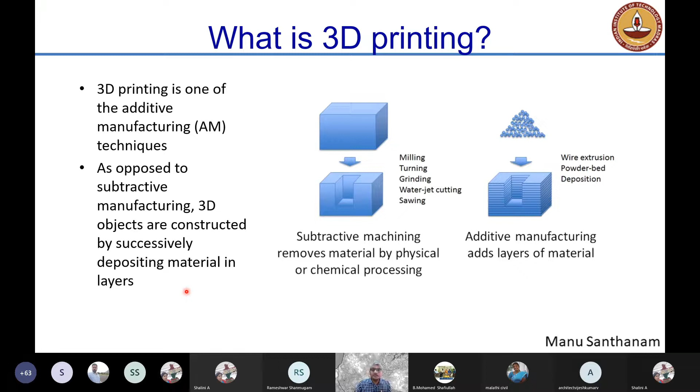In construction, 3D printing is typically accomplished using two types of processes. One is extrusion-based 3D printing, where the concrete is extruded through a nozzle, which puts pressure on the concrete and extrudes it in the desired shape. This concrete is deposited layer upon layer to create the entire structure.

That can be accomplished by two types of robotic systems. One is a frame-based system, shown here, where there's a frame with a gantry moving on it, and the Z-axis of the gantry carries the nozzle, which does the deposition while the printer moves in all three axes. You could also have a robotic arm-based system, with a single robot in the center of the room that can print everything around it—that's called a robotic arm-based system.

You can also adopt a different technique called binder jetting. This is a bit more complicated for larger structures, but important for producing intricate, smaller structures like scale models. Here, we put a layer of sand, on which we can then put a polymer in the desired shape of the object.

Or, using concrete, we can put cement mortar in a bed and spray water on it in the desired shape, with successive layers of cement mortar laid on top and water placed at those locations to give the desired shape. But there's a lot of cement mortar around the desired object that goes to waste, which has to be removed or reused for the next process. So it's a bit complicated to use binder jetting for conventional construction.

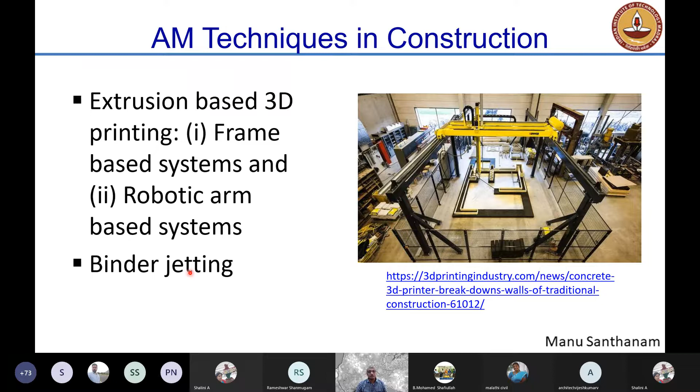From the construction viewpoint, additive manufacturing is very useful because we can reduce construction time and cost considerably. How? Primarily because we don't need formwork anymore. Many of you in construction management can calculate that the use of formwork is responsible for nearly 40% of construction cost and 60% of construction time. That's a substantial amount of time just for putting together formwork and removing it, and this time can be saved almost entirely by the use of 3D printing.

Second, and most important, you can actually achieve shapes that are not possible with conventional formwork. For instance, when trying to make shapes like circles, curved walls, and intricately designed walls, these are not possible with simple formwork systems—you need to really complicate your formwork to print forms that take the shape you desire. In 3D printing, that is possible; you can start creating shapes that were not conceivable with conventional formwork-based systems.

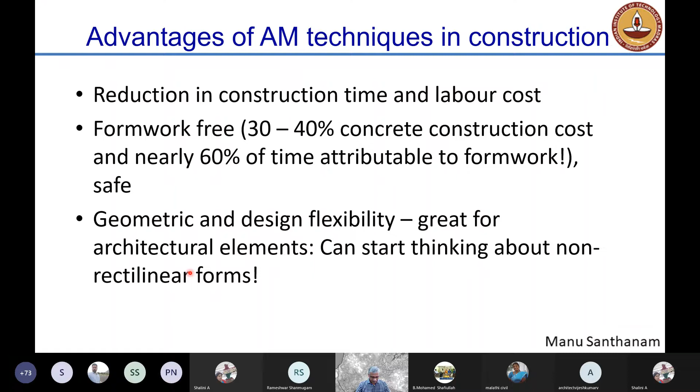3D printing around the world has become really popular, starting from about 2005 onwards. There have been several efforts in 3D printing globally. People are even talking about using 3D printing to print bases on the moon and Mars. You can imagine the extent of research being done on 3D printing over a long period of time. These are some common manufacturers of 3D printers across the world who have been doing extensive work.

I was talking about the robotic arm system. This is what it looks like. It's a robot, and the robot can actually move around itself in several different locations.

All the others shown are frame-based printers. This is the printer that Tvasta manufactured, which we are using for our 3D printing operations at IIT Madras. Again, it's a frame-based printer, and you can see the gantry here with the movable Z-axis.

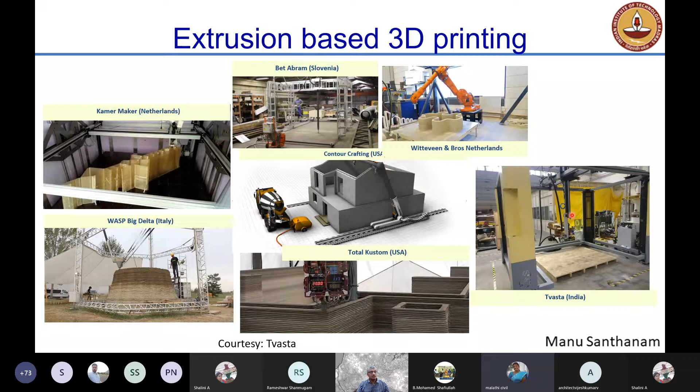Now this is a conventional 3D printing operation in a typical 3D printing factory. This is an example from China, and again here on the top left you have a frame-based printer operating and depositing material layer by layer to produce these 3D printed elements.

You have ribs in between the wall that lend it stiffness. We need some stiffness against overturning, and that is provided by putting the ribs here. Now, one thing you may notice is that you don't fill up the entire area with concrete. Only some area is filled with concrete, the rest remains as cavities.

Once such elements are printed, you can see that they are stacked on the side, and then they can be stacked in the curing yard of the factory and cured properly until they gain the required strength. Then they can be transported to the site and assembled by jointing between the different modules that you've printed separately. The jointing could be in the vertical fashion or in the horizontal fashion, and this way you can actually complete your structure.

The essential difference from precast: of course, this is the same technology as precast in terms of preparing at the factory and then sending to the site. But the primary difference here is that unlike in precast where you need formwork, here you don't need formwork. You're directly printing the desired shape, so it saves you a lot of time and perhaps cost in producing a large number of precast objects that can be carried to the site and used for the printing of the structure.

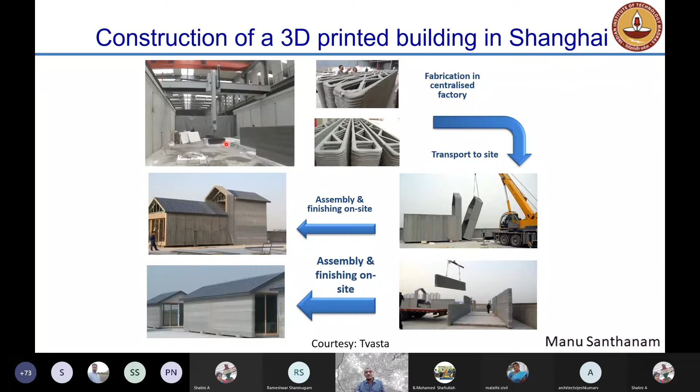Off-site implies similar to the condition I showed you here: the printing is actually done in a factory, and then the printed elements are brought to the site and assembled. For instance, Winsun Global, a Chinese company, claimed that they printed components for 10 such houses, like you see the white ones here, in a single day. Now, I don't know if the claims are true or not, but you can realize this kind of productivity with 3D printing, and that's quite amazing.

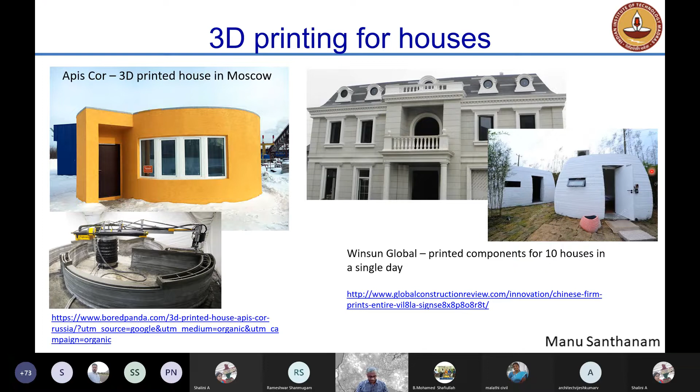There are more examples. This is an example by Icon. You may have seen a recent news item in Google News also, where Icon has used this kind of technology or house design to create a cluster of houses in Mexico. You may be able to see that news somewhere. I'll show you a picture also in the next slide.

This is again a slightly frivolous use, but just to demonstrate the use of 3D printing: you see here the concrete castle, a miniature castle. It's not really a big one, and all the elements in this castle were 3D printed. There's no steel involved, it's just concrete.

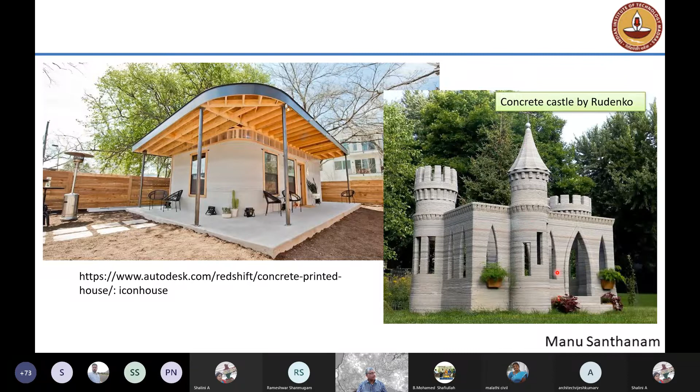Now you may ask, what's the big deal? I can as well do this with a precast operation, especially when producing very large scale objects. For instance, if I have to produce the walls for 500 houses at a single time, why don't I rather use precast? You're right, why don't you?

The only difference would be if, out of the 500 houses, 500 different owners wanted each house customized with respect to their taste, wall sizes, shapes and so on. What do we do then? We can't use precast, because precast requires all components to look exactly the same. That's something we can achieve now with 3D printing, because it can help customize mass housing, especially for ground story or single story housing. You can do a lot with 3D printing.

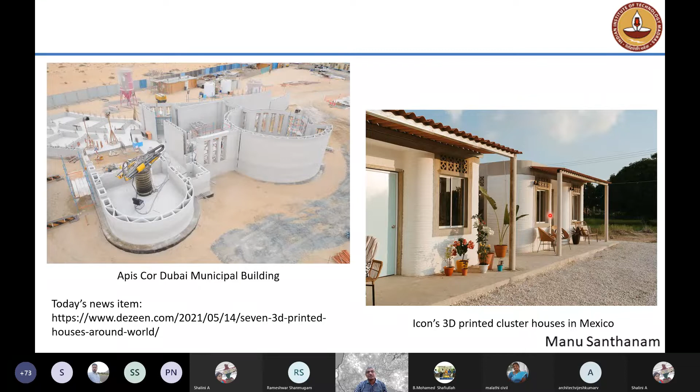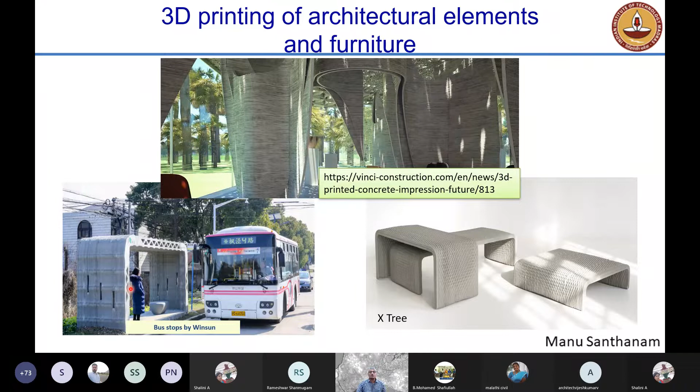Some more description of intricate shapes that you can actually print. Look at the shape of this wall, it almost looks like the interior of a tree. These are extremely interesting furniture elements that are 3D printed. This is a bus shelter that is 3D printed. So many different possibilities with 3D printing exist for creating very rapid construction, not just of buildings but also accessories.

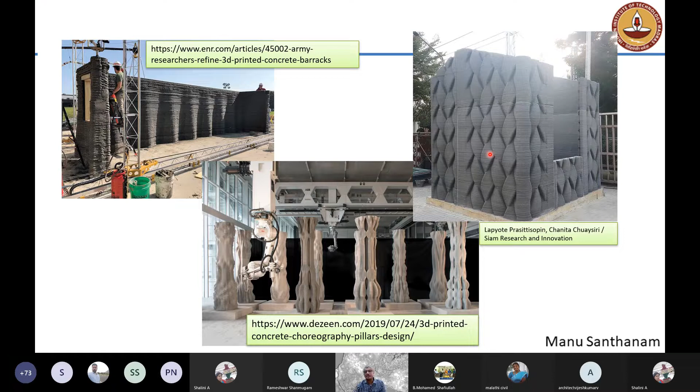These are army barracks constructed by the US Army Corps of Engineers, and these are special columns created at ETH Zurich. You can see the kind of shape that has actually been created, something not possible with conventional construction. You can see this security shed created by Siam Cement Company in Thailand, and again the kind of intricate design created by 3D printing. You can't really imagine such things are possible with conventional concrete.

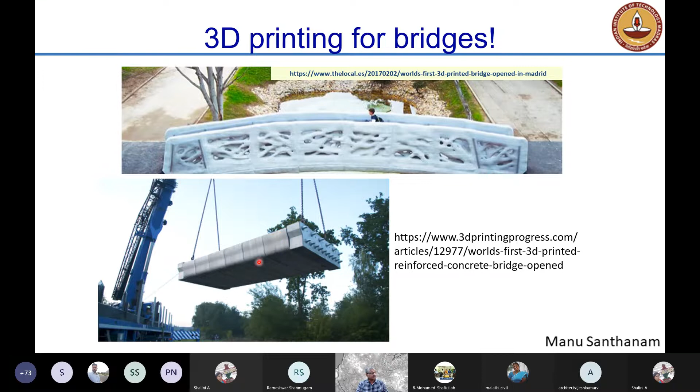Now, I've given you examples from all over the world of how 3D printing has been demonstrated. Mind you, these are all pilot projects, not really commercially intended for general use. Of course, there's a lot of commercial residential projects coming up now, but there are challenges there. I'll depict what these challenges are in just a minute.

Now, with respect to housing, there's a severe shortage in India. We expect our urban population will grow to 1 billion by 2050, a large population. Even as early as 2030, we'll need 100 million houses to satisfy the needs of the urban population. Many of you may be aware the government of India threw open this challenge for builders to come up with rapid means of construction of houses.

This was established by the Global Housing Technology Challenge in 2019, under which there are 6 different lighthouse projects taken up across the country, demonstrating the use of technology to rapidly construct housing projects. In Chennai also, there is a major housing project coming up using volumetric precast construction for demonstrating mass rapid housing.

In this GHTC event in 2019, 3D printing was identified as a potential new technology that may have the potential for revolutionizing the construction industry. With that, the government of India is trying to sponsor some projects to really get 3D printing going in the realistic construction industry. There's also a lot of private investment possible, and people have been coming, although very slowly, to start putting more investment into 3D printing to make it happen as a housing technology.

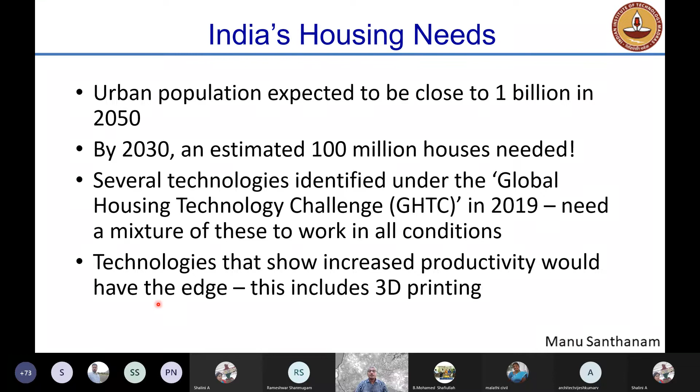Now, why do we want to 3D print houses? As I already said, precast presents a very good alternative when it comes to mass rapid construction. But at the same time, you cannot do mass customization or individual customization in a mass housing project. And that's where 3D printing can actually do a lot for you.

The other aspect is that you can produce your forms to be structurally efficient. You don't need to go with very solid looking objects anymore. For instance, when you talk about a reinforced concrete beam, that beam does not need to have material everywhere. There are only some locations where material is actually designed to resist the kind of loading that comes onto the beam. Can we make optimal shapes come out with 3D printing that can be much better in terms of lesser material usage and lesser weight overall, that can improve the performance of the concrete structure?

And again, as I said, you have most of these walls with cavities. So the cavities make it possible to actually conceal your utilities inside. At the same time, you can also do weatherproofing. Heat and soundproofing can be quite nicely done. And the other advantage could be that when you have difficulty doing construction projects in far off locations where you don't have sufficient infrastructure available, 3D printing could be an option, provided you have at least transportation infrastructure built up until a certain distance.

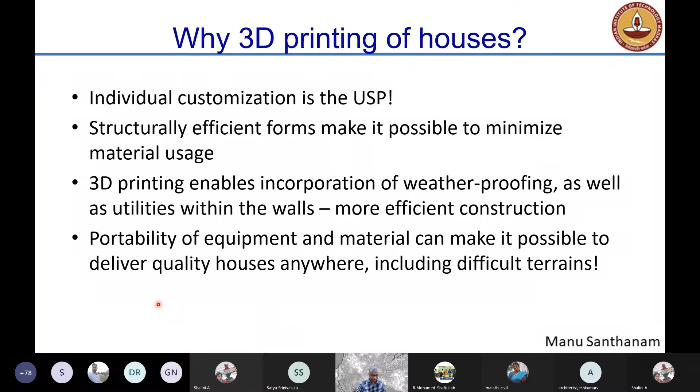Now, the issue is, are we ready for deployment for mass housing projects? Probably not at this stage, because there are several challenges. For instance, how do we automate the reinforcement placement? Right now, it's only manual. People identify where the cavities are, manually place the reinforcement, and then grout it to keep it in position.

The finishing processes can be automated also, and there's some work that needs to be done in that regard. You can, of course, do a proper 3D print and then plaster it, but plastering concrete means you're really wasting material. You need not plaster concrete. You can as well finish the surface, and that's where crafting can also be done along with 3D printing.

Now, printing is mostly interesting to do for wall elements or column elements. When you start thinking about horizontal elements, it's really a waste of time and money to start printing those. So can we think of a strategy with which these can be made without wasting too much time printing the entire element? Imagine if you have to deposit material over a large area, layer by layer — that will be time consuming. So can you adopt a way in which you print the periphery, put the reinforcement, and fill up the remaining area inside with conventional concrete, or even self-compacting concrete? That is something that can be done in a rapid fashion, right?

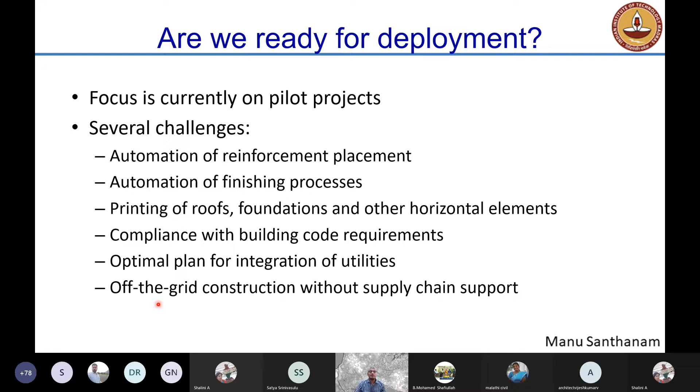The major challenge as far as housing is concerned would be, how do we make our structures comply with building code requirements? Because these are layered materials, not solid materials. So how do we measure their strengths even? How do we measure other performances like fire resistance, earthquake resistance, and so on and so forth? We need to start creating test methodologies to ensure these can be measured appropriately. And of course, when you plan utilities, how do we design the optimal plan? As far as supply chain support is concerned, if you can plan these things and optimize it, you can then get ready for deployment with this technology. There are also, of course, other challenges all over the world.

The construction industry is usually risk averse. We don't want to take too much risk as far as construction is concerned. And generally, construction is driven by cost. They are not driven by interesting alternatives; rather, the cost is driven by what is actually the cost today for doing construction, not the cost required for the complete construction project. Material cost, or sometimes the initial investment cost, often outweighs any other benefits you might think about in the long term.

As a result, implementing new technology in the construction industry is always a big challenge. And generally, consumers also fear new technology. People always think, why should I take a risk? Why should I be the first to try out a new technology? So that's obviously a challenge which you need to overcome through proper dissemination.

Scaling up requires training several people, including consultants, architects, and practitioners, on how to actually work with the material, how to do the design, how to do the construction. All that requires a lot of work in terms of scaling up, and that is still a challenge today.

And of course, there's a lack of data for regulatory approvals. How do we actually assess the material? How do we assess the structural components built with this material to really make them suitable for use in a construction project? How do we satisfy the codal requirements, the standards, and so on?

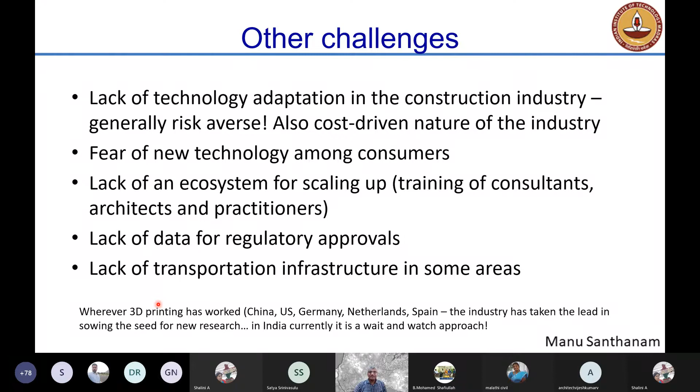Now, one thing you must note is that in all the other countries where 3D printing has been successful, such as China, US, Germany, Netherlands, Spain, etc., wherever those major projects I showed you were from, it's driven by industry. Private industry has come in a big way to drive the construction projects. In India, industry is still not fully into it. They are playing a wait-and-watch type of game. If they get in a big way, we can really push this technology to the limit.

Now I'll show you some development of the material as well as the technology in the work that we did over the last 4 years. We started off with a very simple printer. You can see a very small scale printer with a frame and the gantry, which can move in 3 axes to do the deposition. This is the first initial nozzle that we had, and these are some of the first shapes that we created. This is with lime-based materials, and this is with clay. That's the advantage of 3D printing.

Now there's a lot of emphasis around the world on going back to nature. While in India we want to move towards concrete, if you go to Western countries, people want to start thinking about how we can use local soil for doing construction. And 3D printing actually shows a way for doing that. People have built demonstration structures with local soil itself, which is being 3D printed into the structural shape.

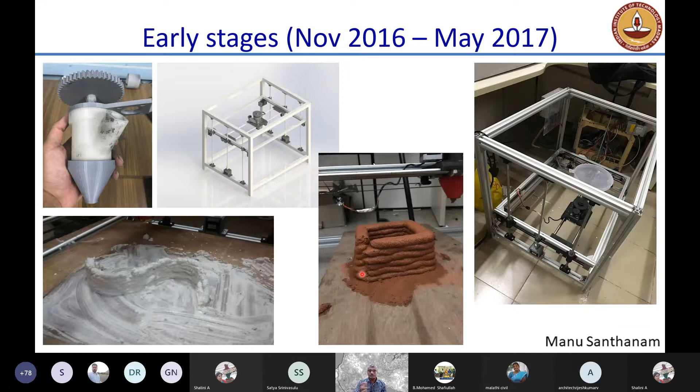And of course, we started experimenting with concrete. Now, as I told you, the concrete has to have a special characteristic because you need to push it out of the nozzle, in the desired shape. It needs to be spread onto the foundation in that desired shape. And when you put the new layer on top of it, it still needs to be fresh enough to ensure sufficient bonding between the layers. You don't wait for the layer to get hard before you put the next layer, or there'll be an interfacial problem and a major failure. So your layers have to be reasonably fresh while the new layers are coming on top.

And that requires very careful control of the rheology of the concrete. Rheology is something most of us in research talk about a lot with special concretes like self-compacting concrete, but here the rheology is a little different. In self-compacting concrete, you wanted the material to have a low viscosity and low yield stress. In 3D printing, it's just the opposite - you want a high yield stress and low viscosity. High yield stress because you want the material to retain its shape while you print on top of it.

At the same time, the material should be less viscous, enough to extrude out of the nozzle. So those are characteristics that are quite different from what we are used to as far as self-compacting concrete is concerned.

Our initial mix design used a binder to aggregate ratio of 40 to 60. You can imagine that's a very large amount of cementitious material in it. Now we are optimizing this mixture to be able to print with even 25 to 75 binder to aggregate ratio, which is more or less similar to what you have in conventional concrete.

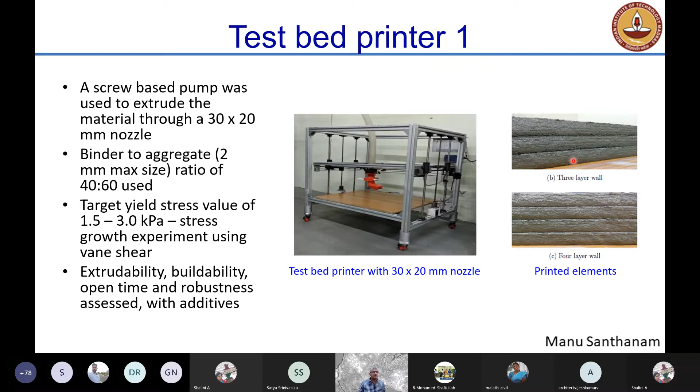These were some additional shapes. You can see square elements that were created with 3D printing, and these layers printing on top do not have such a large effect that the bottom starts deforming. If your concrete is not properly formulated, as you put more on top, the bottom layers will start flowing out—you don't want that to happen.

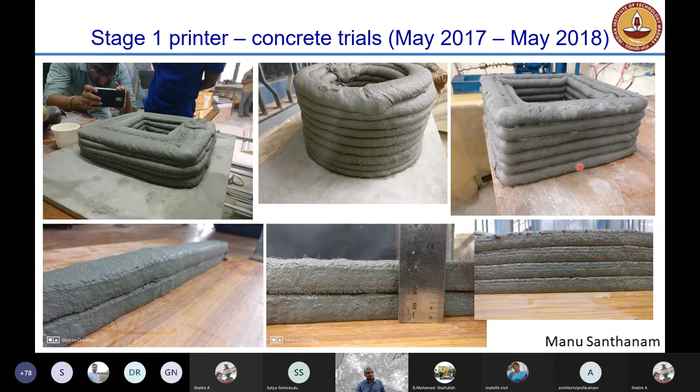Now, the issue with testing is always a challenging one, because in normal concrete you can always make cubes or cylinders and test the strength. But here, how do you bring in the effect of the interface? So you need to start thinking about methodologies more similar to masonry.

Of course, with fresh properties, you can do the flow test. You can establish the relationship between the flow and the vane shear yield stress, and use that for your design purposes.

But with respect to mechanical characteristics, here there's a 4-layered element being loaded in compression, and you can see it's a fairly good failure because the material is cracking properly and not going through the interface.

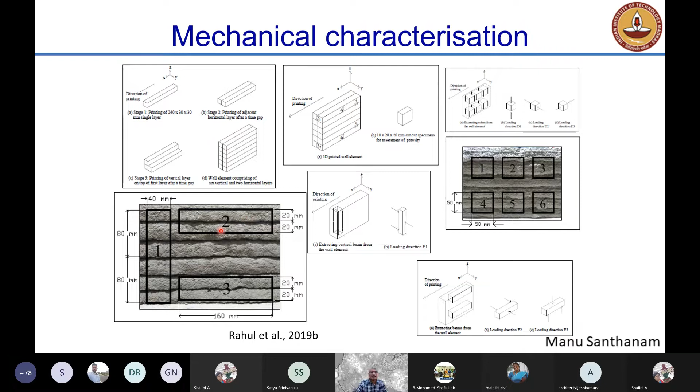Nevertheless, it's important to establish interfacial strength, so we went to a much more detailed scheme of characterization where we printed elements with multiple layers in both directions, then extracted samples from these layers. Cubical specimens as well as prismatic specimens were cut out and tested to establish the proper material characteristics and the effect of the interface between the layers.

So you see here, a flexural test is being done for a 2-layered specimen, and you have a proper flexural failure. There's some shifting of this crack at the interface, meaning it is moving along the interface to some extent.

Here it's a properly compressed material, as you see from the previous picture. This is the same sort of object which has failed in compression.

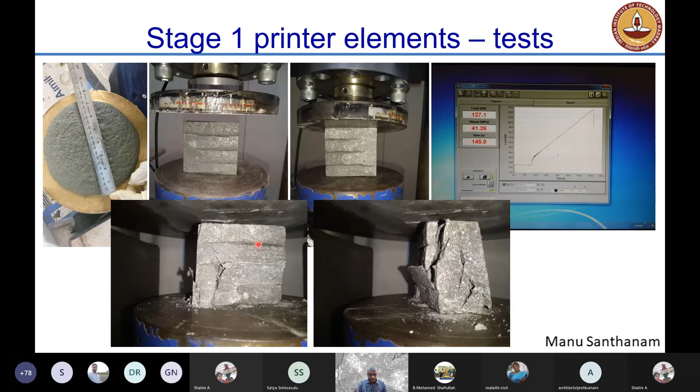This is actually a test to measure the shear capacity. What we did was we took a core in this direction, only about 20 millimeters, and used that to create this interface in the middle, then did a direct shear test on it to measure the interfacial strength.

And this is a pull-off test that is being done for the material, to ensure how well it's bonded to the next layer. So there are ways in which you can test it, but none of these are standardized yet.

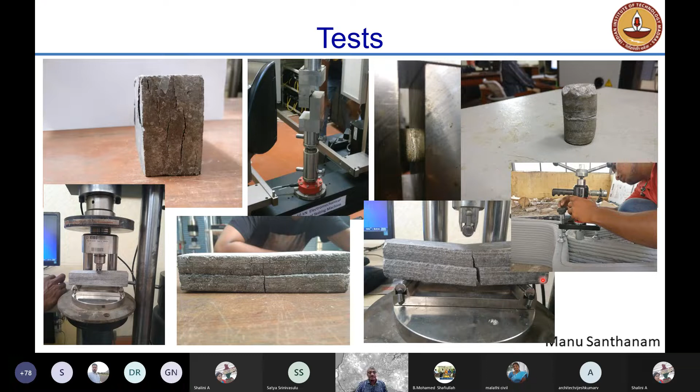These are just some shapes that we played around with, nothing special here. So from that simple frame-based printer, we moved to a larger frame-based printer, which had a slightly different way of depositing the material.

In this case, what we did was we used a pump. The material was fed using a hopper into the pump. As the primer pushed, the pump piston moved backwards to take in the material. Once all the material was filled up, the piston moved forward, pushing the material into the pipe here, which carried it to the nozzle.

In one stroke, nearly 75 kilograms of the material could be pushed through the pipe to the nozzle, so our printing was restricted to less than 75 kilos at a given time. Why? Because when the pump is going backwards, it's not pushing any material into the pipe, so you'd basically be pushing air into the pipe, which is a bad thing. You want the material to be continuously getting pushed, just like conventional concrete pumping operations.

So here is the larger printer. You can see the frame, the vertical axis, and the nozzle attached to the vertical axis, and these are the elements getting printed. These modular elements, each weighing about 60 kilograms, were printed using this kind of printer.

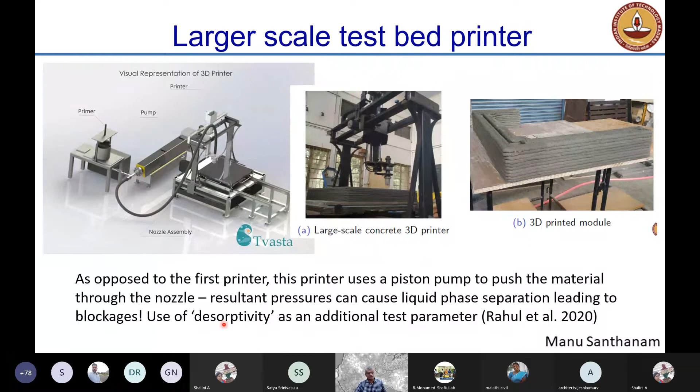You can see here the pumping being done, material coming out nicely in a single flow.

You see here the same printer now being used to actually print the concrete. Several modules are getting printed here, and we ended up printing modules which were nearly 30 centimeters in height, with 20 layers of 15 millimeter depth each.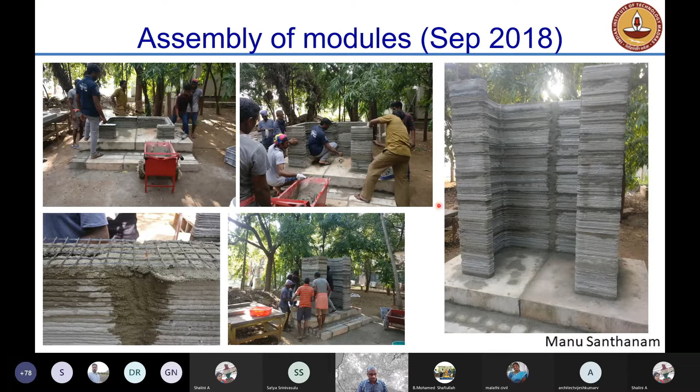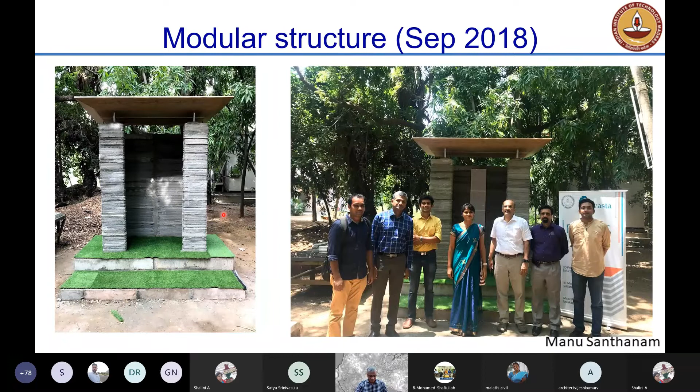Just to demonstrate the effectiveness of 3D printing, we had personnel visiting from the Ministry of Housing and Urban Affairs, who inaugurated this module. We also did a workshop on 3D printing at that time, where the Honorable Secretary for Housing also visited and talked about this technology.

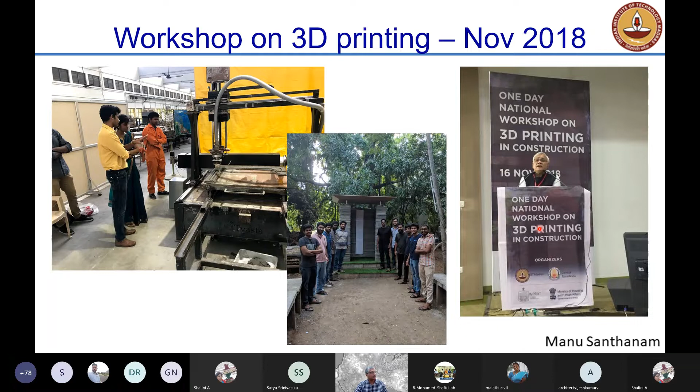We then went on to printing additional elements like furniture - a chair, table, and so on - just to demonstrate that 3D printing can be an option for printing furniture also, not just buildings.

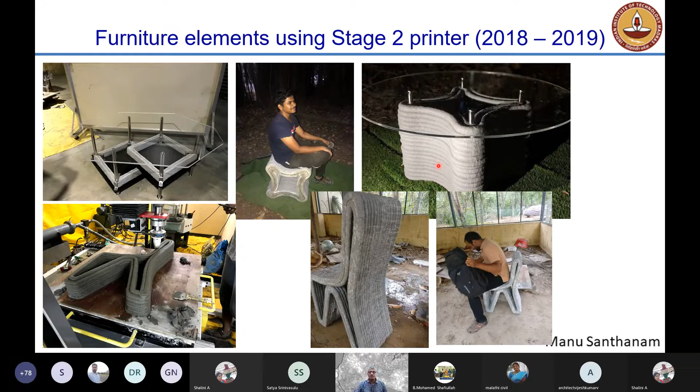You can also produce complicated shapes. For instance, here you can notice that the material is deposited in a slight offset with each layer, and that enables the printing of material which does not need to be supported from below, and that's very crucial if you want to produce architecturally interesting shapes. Okay, for instance, imagine if this were to be used to print a column on the outside, which would produce a very interesting look on the surface.

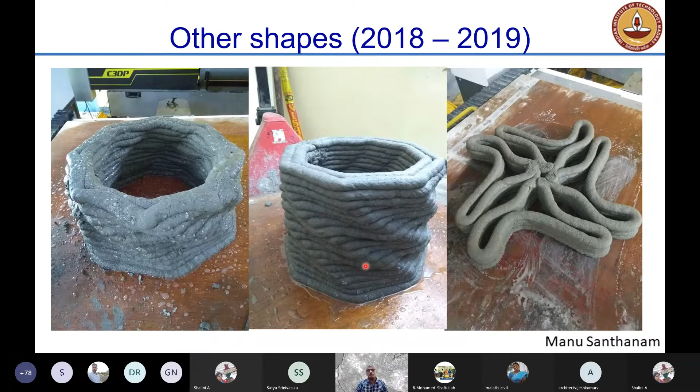So this is the printer that was then made by Tvasta for larger scale printing. With the previous printer that I showed, we could print up to a maximum height of 50 centimeters, not more than that. With this printer, we could go up to a height of about 1.4 meters.

This was partially sponsored by Larsen & Toubro, L&T, to help us build a toilet module in 2 halves. We were going to print a toilet in 2 halves. So we had a base slab, the lower half, and then the upper half and the roof slab. All of it were to be printed using this sort of a printer.

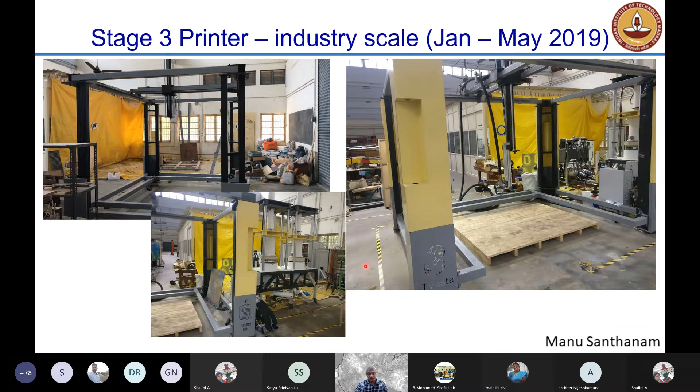So I'll show you more pictures of the printer here. Again, you can see the nozzle in a close-up here. Here what we did was we had 2 hoppers and 2 pumps. The advantage was while the material from the hopper is getting pushed towards the pump, pump 1 is retracting its piston to fill in the material. At the same time, the pump 2 is actually pushing the material out.

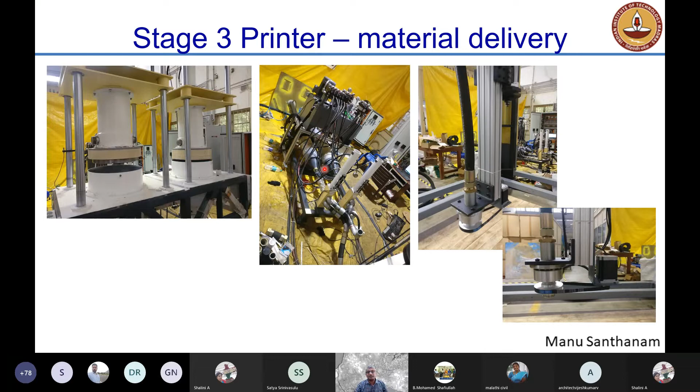So the tandem pump system ensures that while one pump is getting filled up, the other one is discharging, and then the thing is reversed, and then you have a continuous operation of the pumps possible, which makes it possible to continuously do the printing. And with that, we wanted to print this sort of a toilet module.

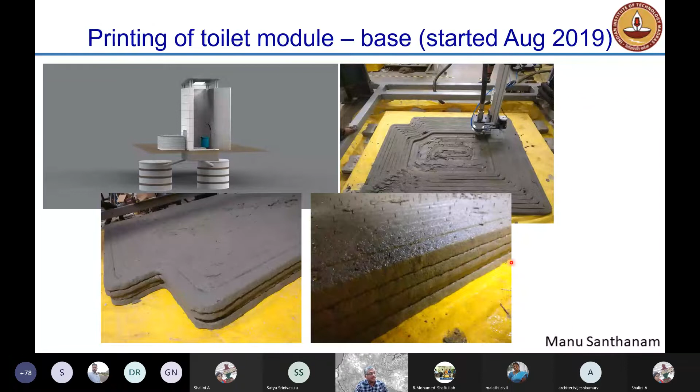And this is the base slab which is getting 3D printed. As you can see here, it's a waste of time to print a horizontal element. Why would you want to fill up such a big area with a single layer and then put one more layer on top and one more layer on top, like what is shown here? There are 5 layers. We wasted a lot of time in doing this. Actually, instead of that, you could just print the periphery and fill up the inside with conventional concrete.

One half of the toilet module coming up slowly, in different number of layers. And to see here, the walls were also designed without any filling in between. So this was an empty cavity here. To prevent these 2 outer walls from collapsing outwards, we kept these steel meshes after every 3 or 4 layers to ensure that the walls did not move outwards.

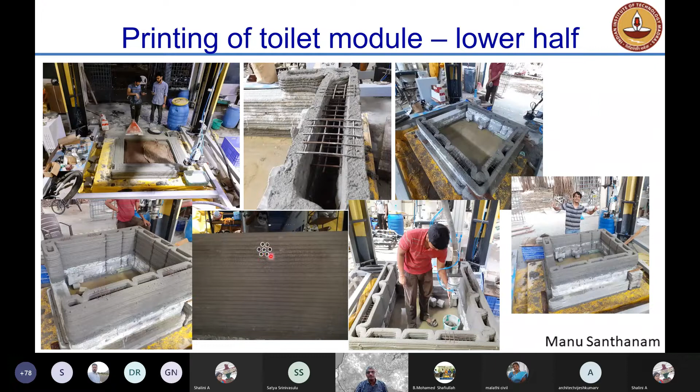You can see here a clearer depiction of the wall cross section. We also let in pipes to carry the sewage as well as fresh water into the toilet. And this is the fully completed lower half of the toilet, which has the partial entry for the door here.

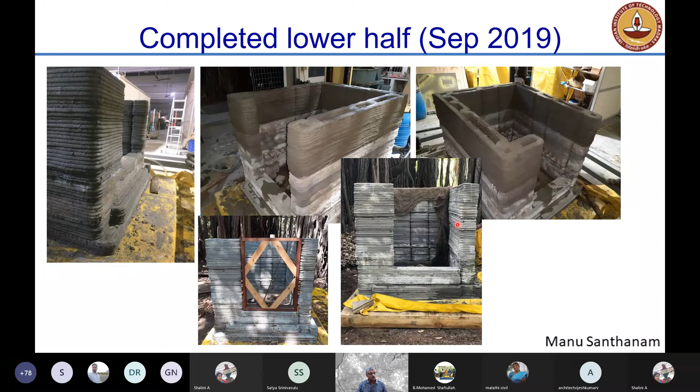The upper half was again completed in a second round. So this is the upper half with the roof also that was 3D printed. For the roof, of course, they had to assemble formwork inside and support it from inside to print the roof on top.

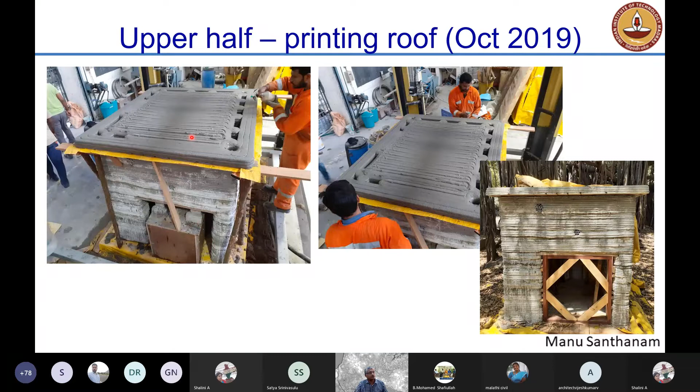Now, the next stage was to actually take this to an industrial scale. So to construct the house that we have on campus today, we had to print the elements on an industrial scale to really get the house construction done in a very fast manner.

So here they realized that they could not use the printer to print on simply one bed. What they had to do was print on multiple beds. So they put the printer on rails. You see here, there are rails at the bottom. The entire printing setup can be moved along these rails so that the printing can happen on this bed first, then on this bed, and then on this bed. That means they can print 3 times the number of elements in the same amount of time.

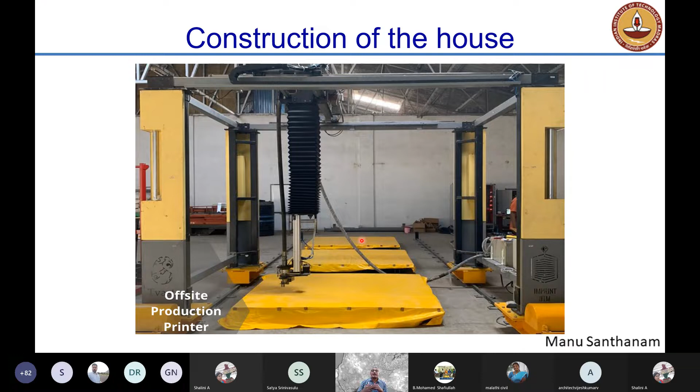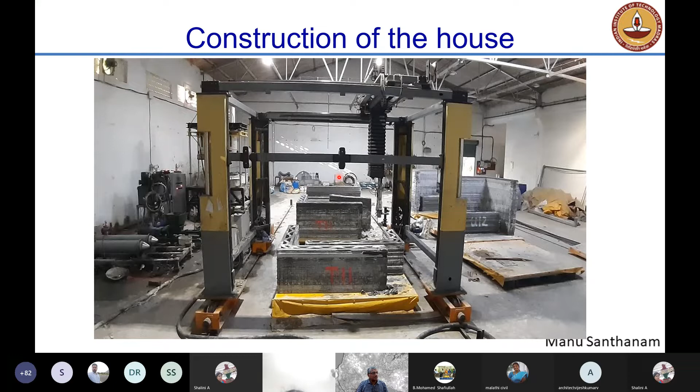And that's what they did. They printed multiple elements which were supposed to be used for the house. These elements were then brought to the site and assembled, in this given fashion to produce the house. So you can see here, this is one element, this is one more element, and that's the third element. So total height of the print was 4.2 meters.

It had to be broken down into three different elements for each part of the wall. You can see here this is a nice curved surface of the wall, and you can see the uniformity of the print quite nicely, right?

Of course, the lintels were all precast reinforced concrete lintels. We didn't waste time in printing lintels. Only the vertical walls in this house were printed.

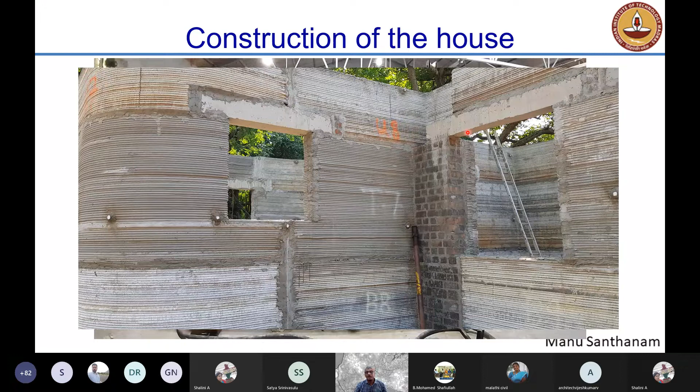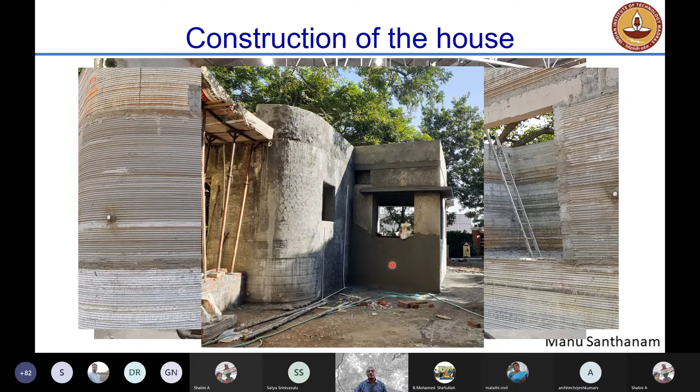After printing, we did plastering on the surface so that anybody who sees this house looks at it like a regular house. But to ensure people could still make out the texture of the 3D printed system, we left out certain portions. Like you see here, this patch was left unplastered so that people could actually have a look and feel of the actual layered structure underneath.

Similarly, when you walk into the interior of the house, you can also see several locations of the wall where the texture of the 3D printed wall has been left as such.

Now this house is properly furnished, and of course this is not the kind of house we want to build for low-income group housing. This is more of a lavish house because the kind of finishing and furnishing done here is unmatched actually in our campus. We have really created a house that is really beautiful, not like conventional government quarters that we live in.

But when we adapt this to producing mass housing, and when it gets taken up to a scale where we produce 500-600 such houses through a single printer, then we can start realizing the economy.

Currently, many of you may be asking: how much did it cost to build this house? With the kind of furnishings and finishings that we actually ended up doing in this house, the cost is well over 2,500 per square foot. And at that rate, nobody can really afford to build in today's world.

But please remember, this is built out of a printer. And this printer, if you use it for multiple numbers of houses, you'll obviously start making up the advantage of reduced cost. If you just print one house with the printer, there's no point, you'll not be able to realize the cost advantage. You have to print multiple units.

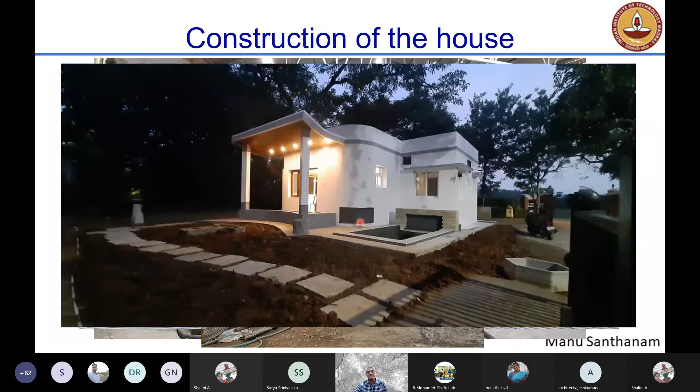So again, in 4 years, we have reached nearly 50% of other 3D printing groups that have been working for more than 10 years around the world. And again, we have reached this at a budget which is less than one-fifth of what other people have spent.

And that's because we are constrained in terms of money. We've not really received any grants for projects. We have not received major industrial grants. L&T gave us a small grant to do the toilet module, but much of this work has been executed because of the attractiveness of the technology itself and the way that Tvasta as an organization has gone about inviting people to look at it and also invest some money into it.

So the house I showed you was sponsored by Habitat for Humanity, which does a lot of interesting work around the world, and they have undertaken this journey along with Tvasta to get this technology realized at a commercial level. Now, how to take this forward?

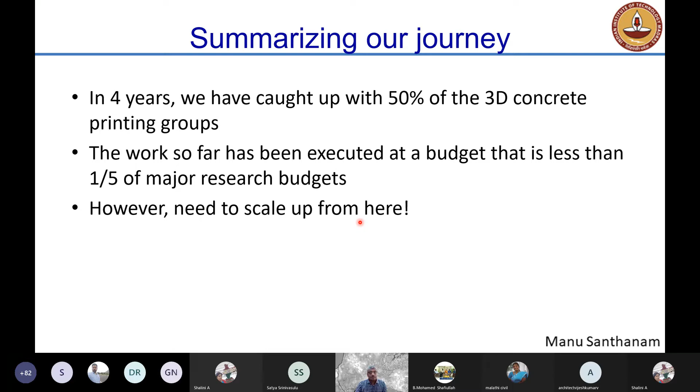The idea would be if you want to do off-site construction, you want to have a 3D printing factory. We call it a micro factory because such factories can be set up within 100 kilometers from each other, so they can serve the needs of a radius of population around them.

So when we create these factories, we create a 3D construction toolbox. The toolbox has the methodology to design very specific elements - straight element, curved element, wavy element. All these things are quite easily created using 3D printing. And we then match these elements to ensure the architect's needs to build up the specific design can be satisfied.

So a 3D model can be broken down into standardized modules, and these modules can be easily printed and then transported to the site, assembled, and you can do rapid construction of mass housing which is individually customized to the needs of the client. That is something you cannot do with any other technology.

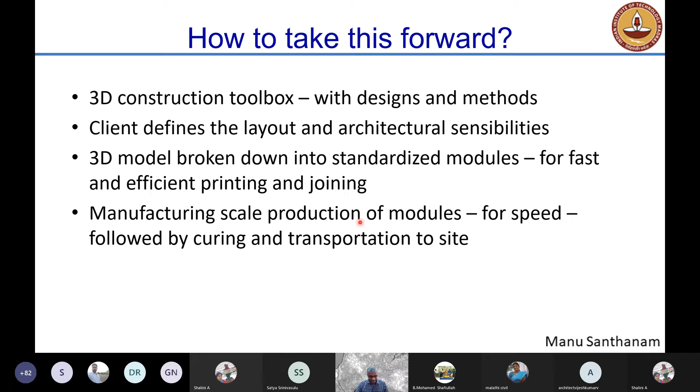So again, there's a lot of support needed, obviously R&D support from the industry. And of course, we are also pitching to our alumni to support this in a big way.

We can realize these seemingly impossible things like printing toilet modules in 6 to 10 hours, printing a single story house like the ones I showed you within 5 days to a week, printing multi-storied structures in less than a month, and also making possible off-the-grid construction in remote locations. For instance, when the army needs support in desert areas or mountainous areas where they cannot do conventional construction, 3D printing may be an answer.

We should be, with the right kind of support, mass application ready in 2 years. That should be the time frame we're looking at to really get this technology to a level where it can be mass applied for large amounts of construction projects.

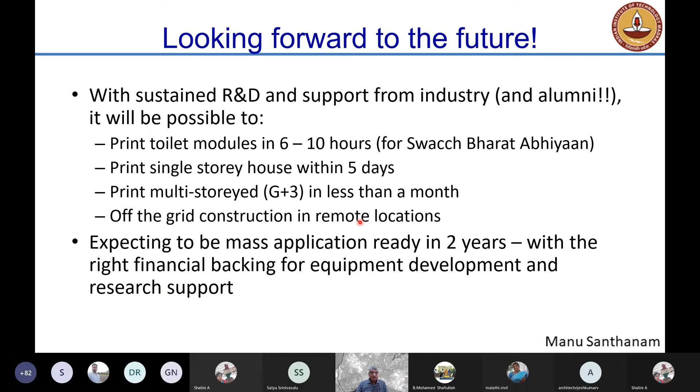So just to conclude, this is India's first 3D printed house. Of course, L&T has also built a house in Kanchipuram with 3D printing technology. The 3D printer itself was rented from a company abroad. So L&T has also demonstrated not just a single story, but also a two-storied house. So there is some interest in L&T to develop this technology also.

But this technology that I showed you was totally Indian from start to finish. Everything was done and manufactured here in India.

And looking forward to the future, we need to start scaling up and standardizing the production process. During this journey, we have trained a lot of human resources. One PhD student has graduated, one PhD is ongoing, and several dual degree and MTech projects have also been done. There are several journal publications already out, and several more are being prepared at this stage.